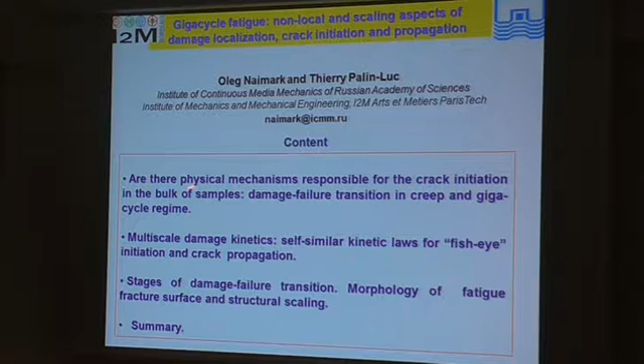And I would like to outline my talk. I would like to discuss whether there is or not a real physical mechanism responsible for crack initiation in the bulk of samples, and what mechanism could be related to specific nonlinear aspects due to the nonlinearity of free energy release, because similar tendencies we found more than 30 years ago in creep conditions.

And in the second part of my talk, I will try to discuss scaling laws for damage kinetics and self-similar solutions concerning damage accumulation that will be linked to fish-eye initiation and crack propagation, and some links between stages of damage failure transition and morphology. That was the subject of our discussion.

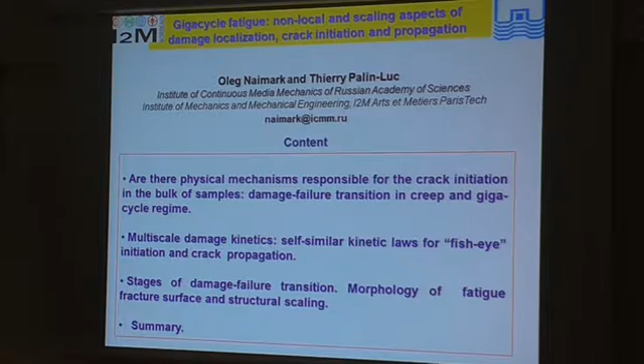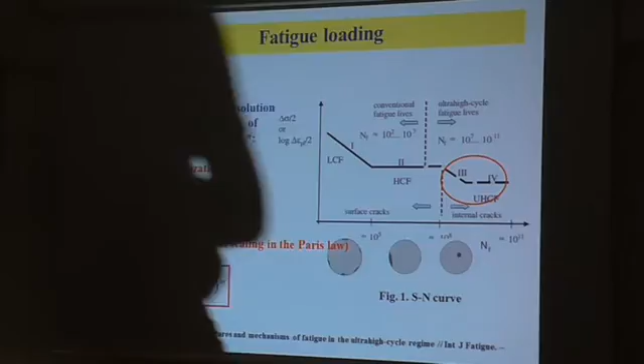I would like to attract your attention to emphasize again this long-term discussed subject concerning the saturation effect of gigacycle fatigue. And I'm very sensitive to the remarks by Mughrabi that very high cycle failure reveals the sharpness of the solution of fundamental problems of damage failure transition at all, not only concerning fatigue loading,

concerning characteristic stages of damage localization, how it links with crack initiation, and how it is typical for very high cycle fatigue, damage-controlled crack propagation, related of course to the understanding of the nature of scaling laws, including Paris law, that could be generalized for very high cycle fatigue.

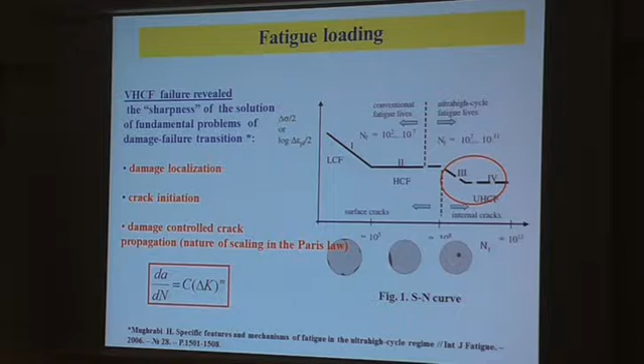And of course, one of the key questions: what could be the mechanism of initiation of a crack with a specific pattern like fish-eye in the bulk of the specimen? Is it really related to some artificial inclusion, or is there some physical mechanism behind that?

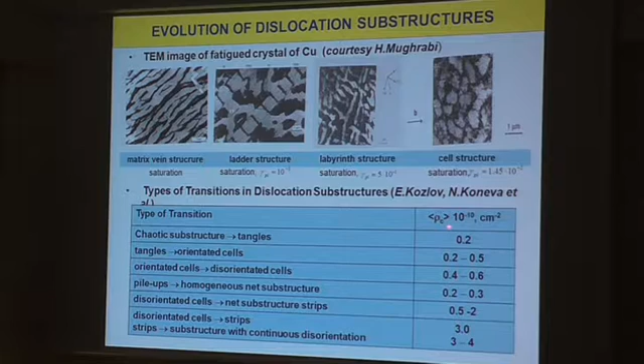For introductory reasons, I would like to attract your attention to the characteristic pattern during fatigue related to multi-scale persistent slip band evolution, when we have transformation in dislocation substructures with a pronounced mechanism of saturation also, because we have change of dislocation density and spacing between characteristic structures, and similar results were obtained also in Russia when very pronounced bifurcations were found in terms of characteristic density of dislocations that exactly correspond to this pattern.

To come back to the possible nature of crack initiation in the bulk of the sample, I would like to attract your attention to our experimental and theoretical results that were obtained around 30 years ago, when we investigated in situ different stages of damage evolution in creep conditions for the sample, combined in situ with small angle X-ray diffraction that allowed us at different times to estimate the spatial distribution of defects.

It's a creep dependence, characteristic time of failure versus applied stress, and it was found that the defect density distribution in this linear portion of the slope corresponds, as in the well-known case, to the nucleation of cracks in the near surface area. But it was established also that when we are approaching some limit, you can see hot spots of damage localization in the bulk of the sample.

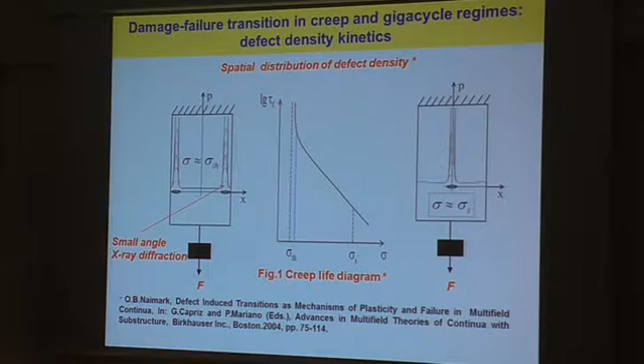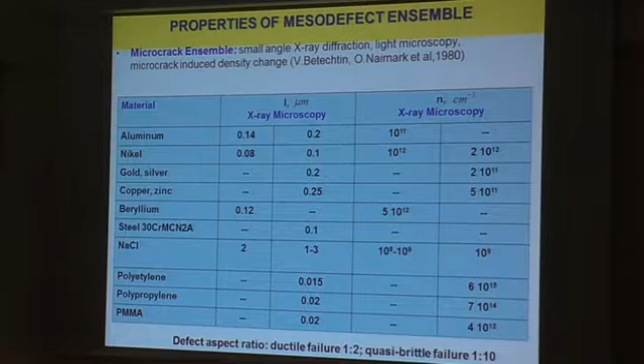In parallel, a field description was developed for these phenomena, and the background of this field description was a result also of the in situ observation of characteristic defects in creep conditions concerning characteristic size and concentration. It was also linked with another area of activity, because it's very important for the prediction of shock material behavior. A statistical theory of typical defects with corresponding modes was developed.

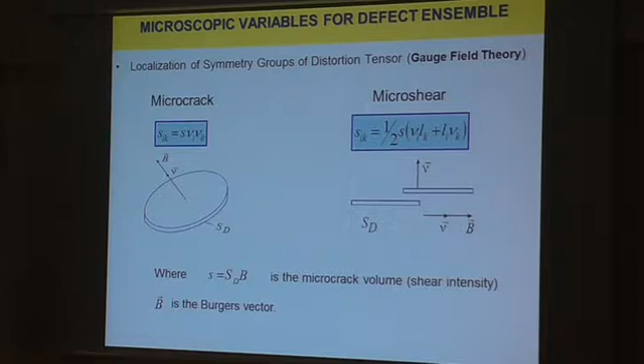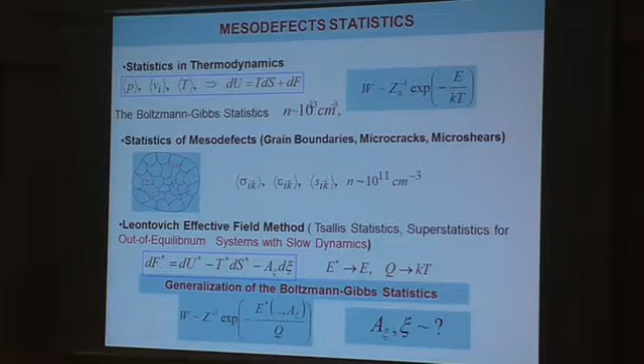A generalization of statistical theory for out-of-equilibrium systems was developed, concerning generalization of Boltzmann statistics. And a procedure of averaging microscopic variables related to microcracks or microshears was realized, with the goal to obtain a constitutive law for the defect density tensor, the deformation induced by defects. And it was found that only a single structural parameter dramatically influences the evolution, and this parameter represents the ratio of two scales, the characteristic size of defects and the spacing between defects.

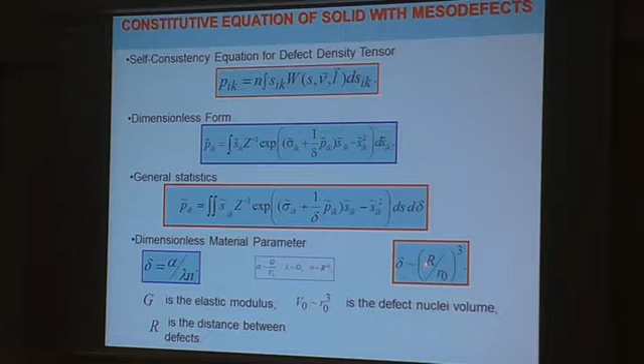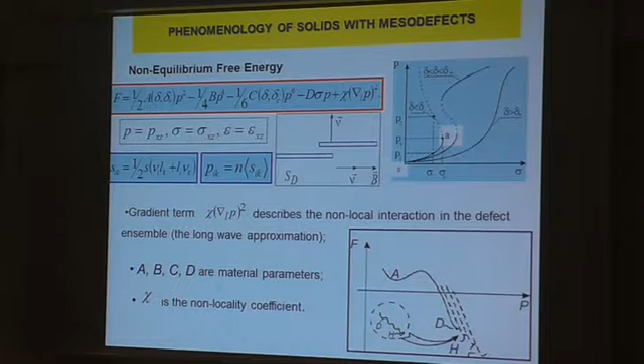When this equation was solved, it was found that there are two characteristic critical points in terms of this delta parameter, with very pronounced bifurcations, and these bifurcations are related to different mechanisms of structure-induced relaxation. For instance, this metastability area corresponds to the evolution of dislocation substructure that I mentioned. But if we pass some characteristic scale, we have a new bifurcation with an infinite jump, and the corresponding nonlinearity was reflected in the form of out-of-equilibrium free energy release in terms of these parameters.

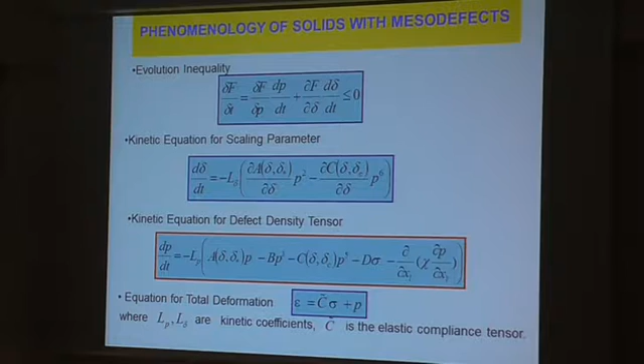And it was derived equation for these field variables, and study of characteristic nonlinearity of group properties of this equation allowed us to establish that there are two types of self-similar solution related to the metastability area: solitary wave, with the front corresponding to multi-scale transformation in dislocation substructure.

But if we pass another critical point, this self-similar solution is transformed into a specific self-similar solution with blow-up nature. It means that over the scales, that is the characteristic value in the self-similar solution, we have blow-up region. And these results were used to explain the scenario of interpretation of experimental data in a typical experiment for gigacycle fatigue.

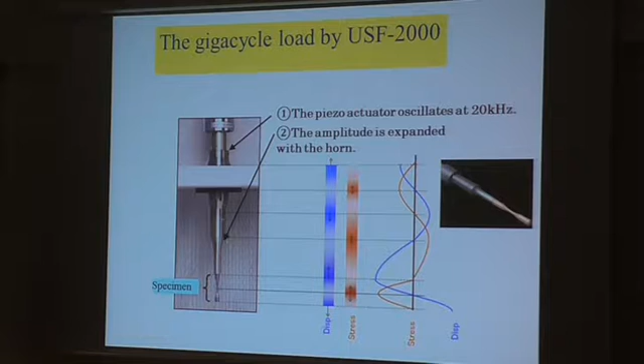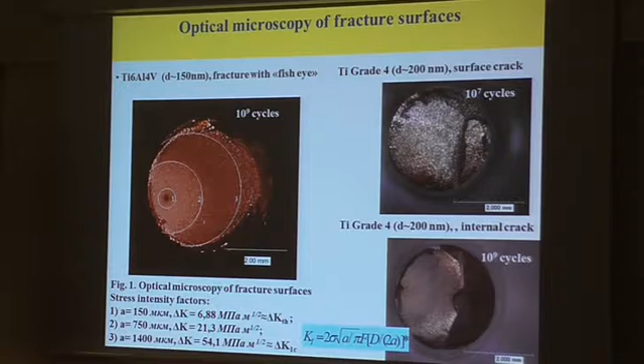We investigated for very high cycle, for gigacycle fatigue, the morphology of titanium samples with fine grains. And of course, we revealed characteristic pattern related to fisheye, FGA area, and the area for crack propagation.

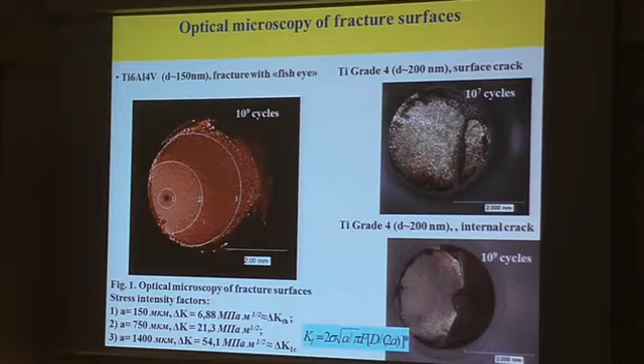And since we discovered self-similar solutions for kinetics of crack initiation and crack propagation area, we decided to establish links between self-similarity in the characteristic solution that was established theoretically and the real scenario and real morphology in terms of the scaling characteristics.

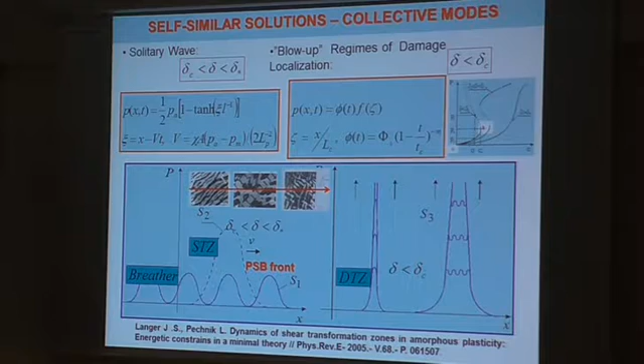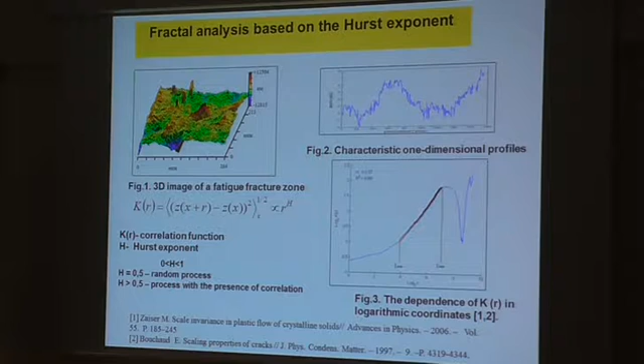And using well-known technique concerning correlation function estimation, we have used results of precise morphology after interferometer profile of New View. We investigate characteristic areas in terms of correlation of defect-induced roughness for FGA area and the area of propagation.

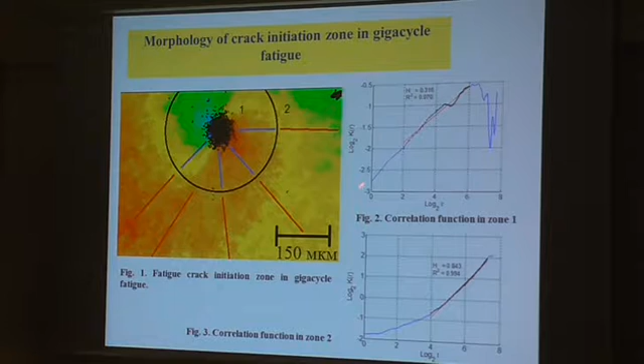And you could find for different areas, we have different Hurst exponent. There is scaling according to defect-induced structure, which is different for FGA area and the area of crack propagation. It's technique of the processing.

And it was very important for us because there is an open question how to modify Paris law for typical high cyclic fatigue area with very pronounced scaling phenomena at the power in the delta K. That is fantastically deep results for the case of small cracks.

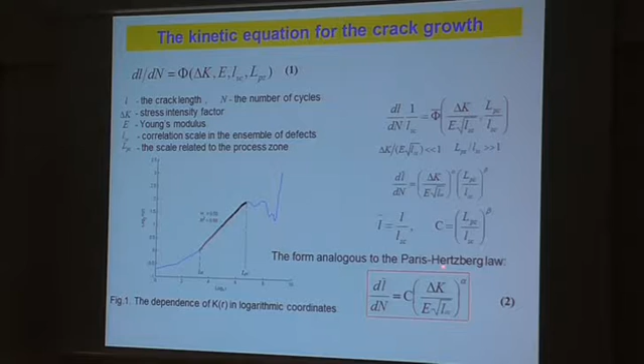And since we have knowledge about characteristic scale of universality in scaling that was estimated experimentally, and since we understood that this character of crack propagation has intermediate asymptotic character, we derived equation for small fatigue crack growth that qualitatively is similar to the Paris-Hertzberg law. I recall to you that it's very good correspondence for small cracks when we have this representation.

But of course, due to the limitation of our resolution, because it was New View, we obtain this value that exceeds Burgers vector, but the structure is the same. It means that this scenario for small crack that is controlled by correlated behavior of dislocation substructure at the crack tip corresponds to this, and then we could jump in the areas that correspond to long cracks.

I would like to attract your attention that this kind of similarity that is close to Paris law in terms of the delta K for high cyclic fatigue reflects very strong power of collective behavior of defects at the crack tip area, because similar structure we have, for instance, if we have shock wave loading of metals for different intensity, and estimation of the slope of this plastic branch every time gives 4 power

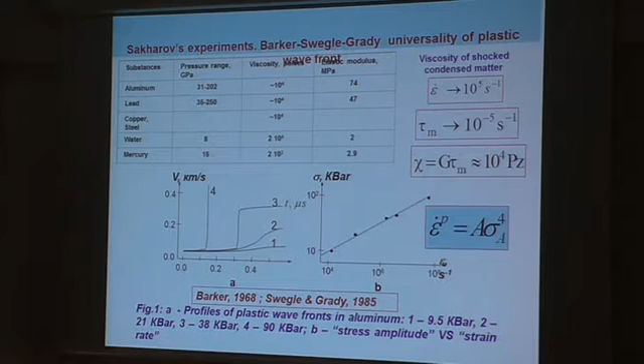or close to it. It means that collective behavior of defects at the crack tip area, due to the very high coherent behavior, could provide some similar properties that could subject crack dynamics like in the Paris law. It's my conclusion.

Similarity between the kinetics of damage-failure transition in creep and high gigacycle loads was established. The stress decrease leads to replacement of damage localization area from the near surface area to the bulk of the sample. Non-local damage kinetics, due to the non-linearity of free energy release, allow the description of replacement of damage localization area from the near surface area to the bulk of the sample.

The crack and fisheye initiation is a consequence of blow-up self-similar solution of damage localization kinetics. The morphology of fisheye area and crack propagation area is characterized by different scaling in the Hurst exponents related to different similarity laws of damage kinetics.

Specific feature of gigacycle fatigue failure is the link of nonlinear damage kinetics with crack fisheye initiation and crack propagation kinetics that can be interpreted in terms of self-similar solutions of non-local damage kinetic equations.